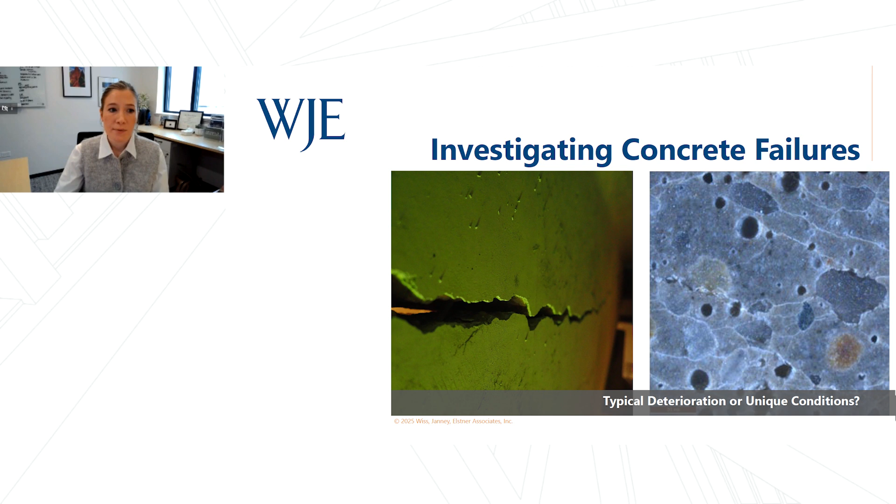During the next hour, materials engineer Todd Nelson and structural engineer Josh White will focus on two distinctive projects involving cracks and spalls that resulted from uncommon structural and materials failures. The presenters will discuss the process of conducting a structural and materials investigation and how, in these projects, the investigative process helped identify unique conditions that led to the failure.

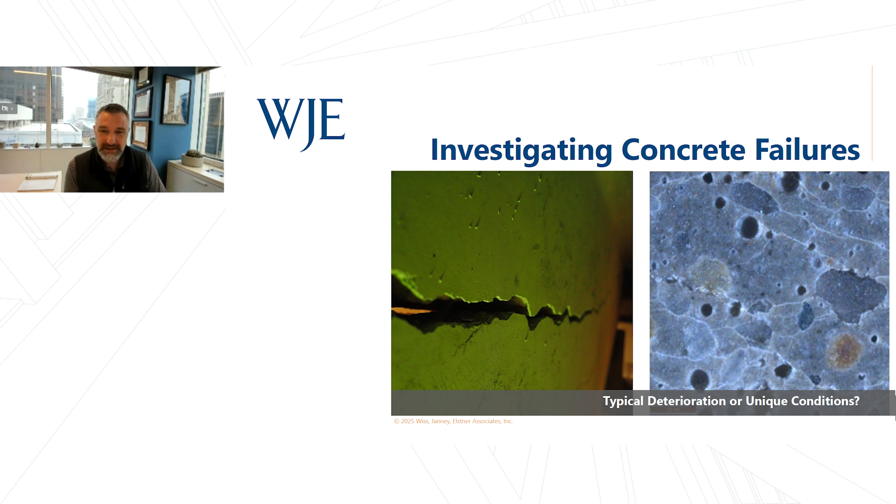Todd, my colleague, and I will be presenting on two unique concrete failures that we've investigated, and we'll be discussing how our investigation was prompted by owners who were observing and responding to signs of deterioration. At the time, the owners were perhaps unaware that the conditions they observed were actually quite unique. But as an owner, a property manager, or someone involved in helping address concrete failures, how do you know if what you are seeing is the result of typical deterioration or unique conditions? We hope that this webinar helps to answer some of those questions.

Accordingly, these are the learning objectives. Todd and I will start today by discussing the question, what is a failure? Then we'll review typical concrete deterioration mechanisms and what might be considered unique conditions. Todd's going to summarize the components of an investigative process, and then we're both going to present two case studies of unique conditions where the owner's responsiveness to finding these conditions helped to address the failure.

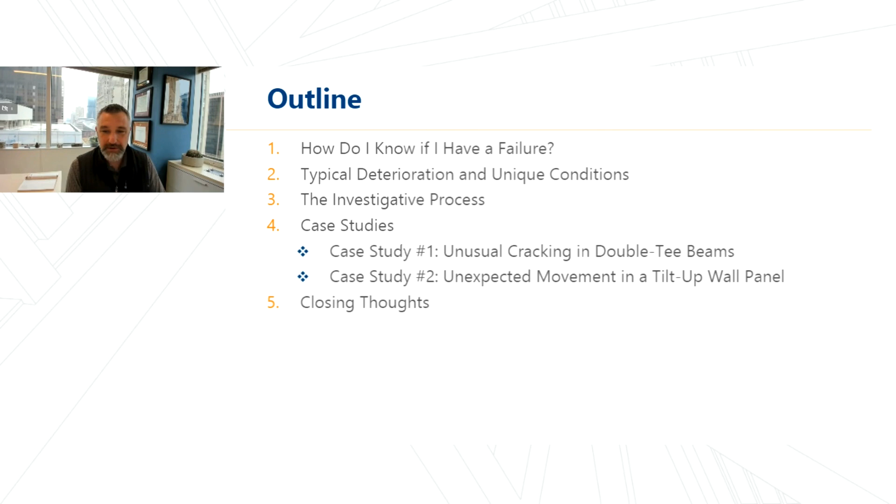So a question you may be asking yourself is, how do I know if that thing I see in my building is a failure? Before we go further, we'd like to discuss what constitutes a failure. What do we mean by a failure? It's worth discussing this for a moment, since failure seems like a simple word with a simple meaning.

It's telling that if I go right now to Merriam-Webster online, there are about 10 entries for this word covering related meanings and their derivatives. But if I were to ask you, the audience, what constitutes a failure, I might hear you say some of these things: loss of integrity, excessive deformation, stressing a material in a structure to its strength limit, or encountering the big one, perhaps only in California, immediate or progressive collapse.

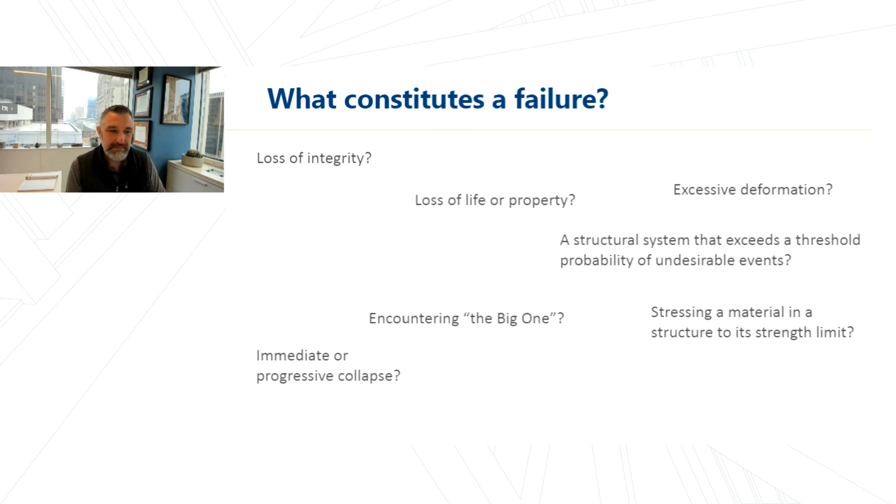And here is a longer definition: a structural system that exceeds a threshold probability of undesirable events, loss of life or property, the inability of a structural system to withstand intended loads, or simply falling short. This is one of the 10 Merriam-Webster definitions.

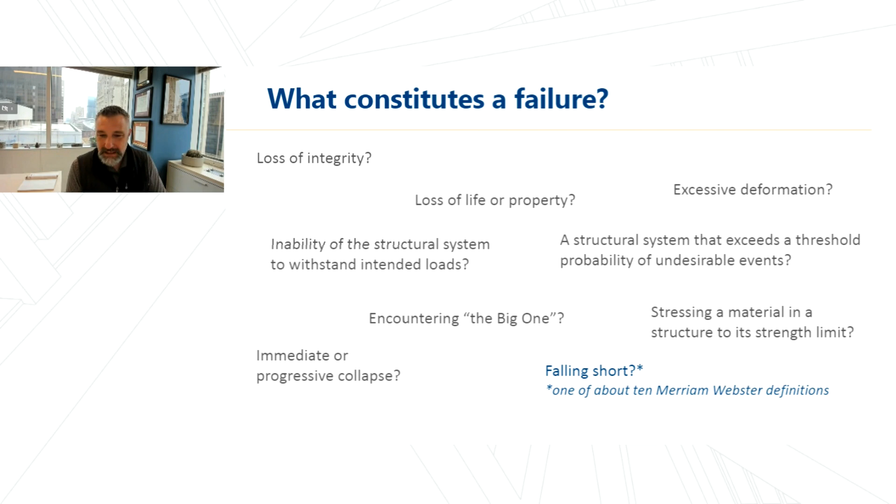And when you got an invitation to discuss failures with us today, no doubt some notable failures in our country popped into your mind, like some of these that you might recognize.

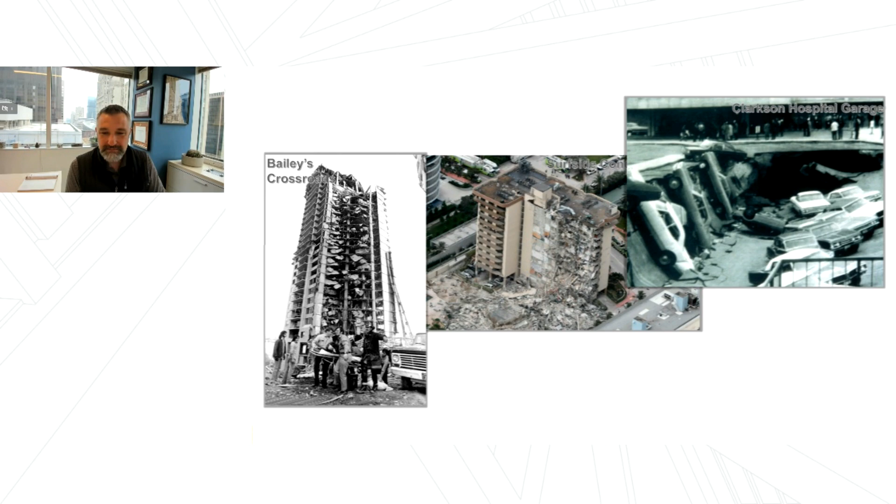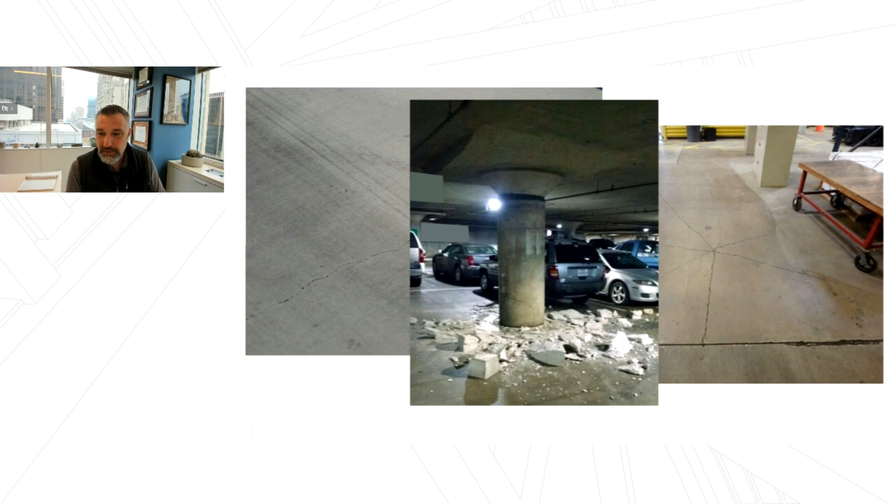But what about this column capital? I don't think there's anyone on this call who would dispute that this is a failure. But even so, the structure is still standing, and even though it is a prominent concrete failure, it's not necessarily a failure of the global system.

So you're likely asking yourself, how do I know that the crack in my slab or the spall in my garage is or is not a failure? As you can hopefully see by now, there are many ways to view and interpret a failure, and some considerations include determining if it is purely cosmetic, which may itself be a form of failure in that it's unmet expectations, or whether there are underlying problems and that simple crack or spall you see is just an indication of what's going on behind the scenes.

Perhaps in the worst case, depending on how severe the conditions are and where the deterioration is located, you may be concerned about a potential for the collapse of a structural element. In order to provide these answers, we use an investigative process.

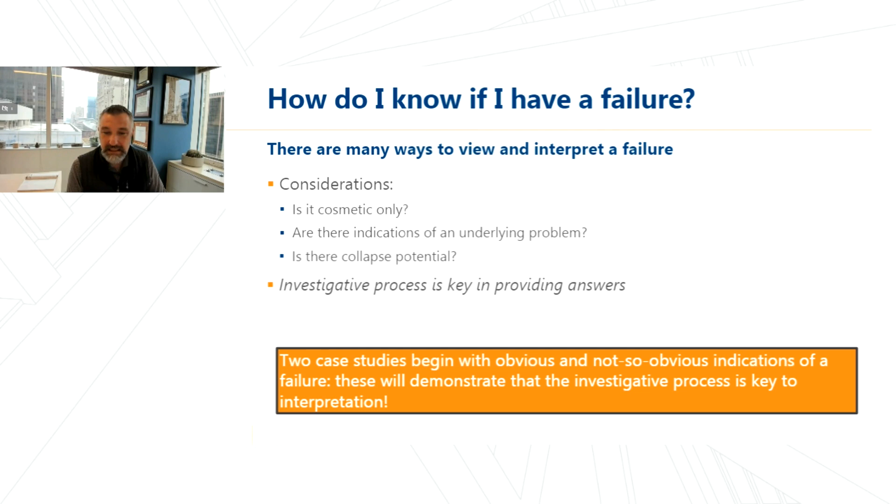Todd and I will present two case studies that begin with obvious and not so obvious indications of failures. These case studies will demonstrate that the process is key in understanding and interpreting what we're seeing in the field.

In the words of Professor Hardy Cross, paraphrased, strength is essential but otherwise unimportant, meaning that strength is just one of many considerations that structures must consider in design, as well as construction practices, architectural constraints, and the owner's needs. What constitutes a structural failure then is also more than just what simply meets design intent.

So let's move on to discuss some common damage and degradation mechanisms. This is a brief list, but it encompasses a lot of the mechanisms you might see in concrete structures.

We'll go over a few of these in the next few slides, but the main point here is that failure can be a relative term. It certainly can be catastrophic, but it can also be surface blemishes like on an architectural panel, and it depends on one's definition perspective, and these can both be strength and serviceability related.

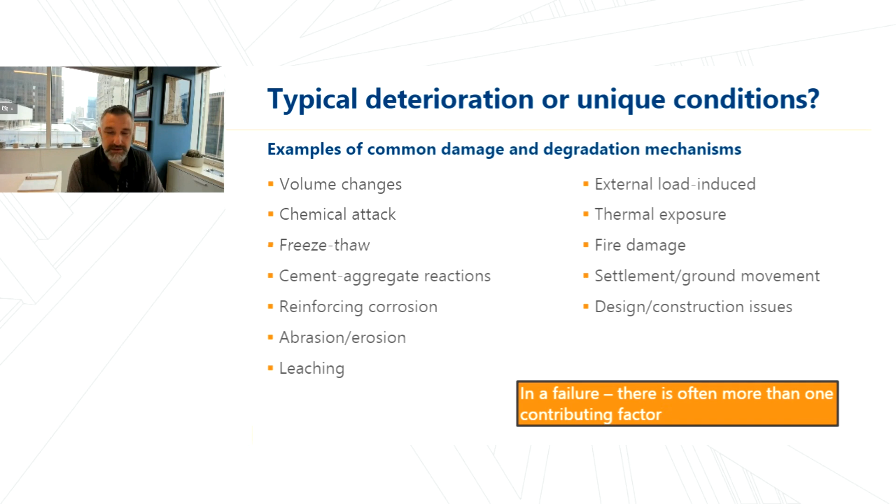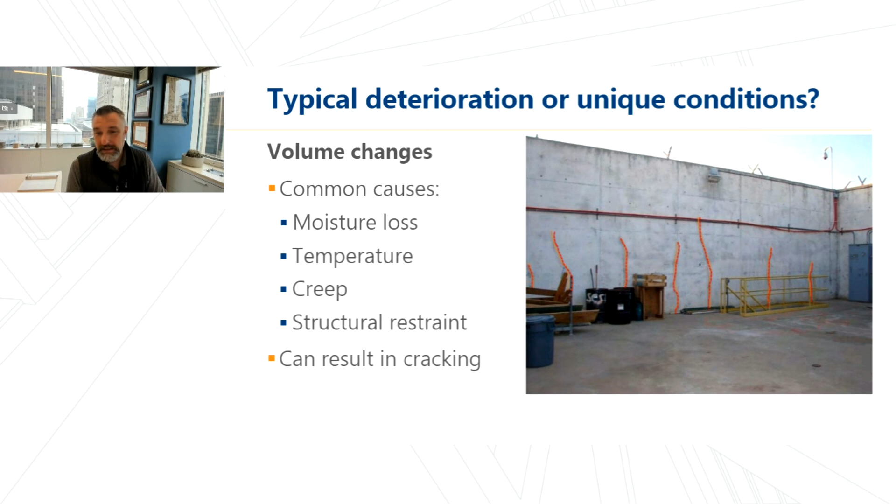Another thing to note is that when we have a failure, it is often more than just one contributing factor. Volume change, for example, is one mechanism which can be caused by several factors, and this can result in unwanted cracking. Chemical attack, which can be caused by various exposure conditions, can result in disintegration of concrete and eventual loss of concrete reinforcing cover.

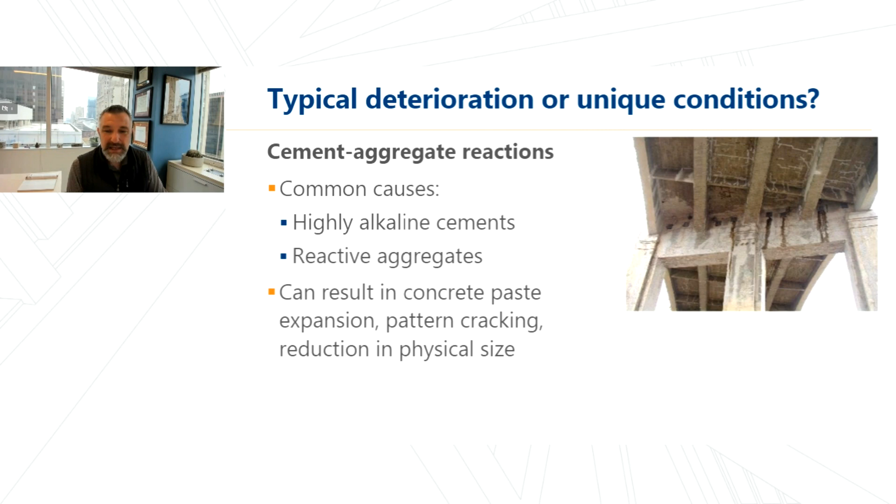Cement aggregate reactions are reactions that occur within the concrete constituents, and this can result in paste expansion, pattern cracking, and reduction of the size of a concrete member, and that can directly impact its ability to withstand loads.

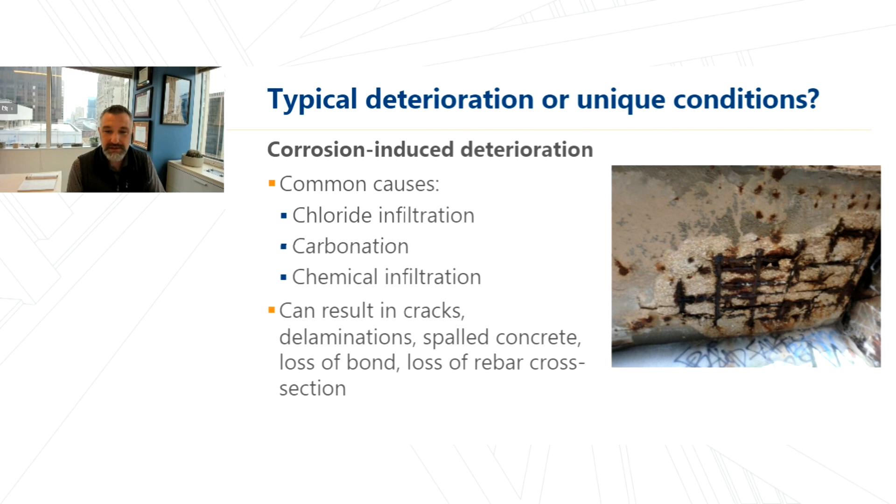Last, I'm going to talk about corrosion-induced deterioration, which is when specifically we have chlorides and carbonation that work through the concrete and they eventually reach the steel and cause corrosion. This corrosion can then result in cracks, delaminations, and eventually rebar section loss.

So you've got this crack in your structure, say it's the one we've seen before here, and how do you know which of these mechanisms may be at play? Is it expected behavior and not a real failure? What caused it? Can I leave it alone with no consequence? Should I repair it? How do I repair it so it doesn't come back?

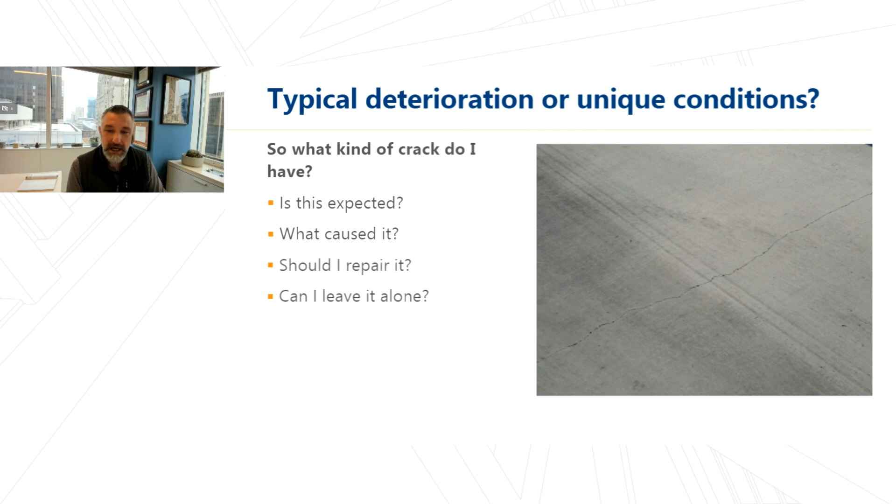I'm going to turn it over to Todd now, and Todd's going to discuss the next steps we take in determining those answers. We're going to call it the investigative process.

Thanks, Josh. I'm going to go through the investigative process that we use to assess these deterioration mechanisms and ultimately assess the significance. And these steps can be applied no matter what the deterioration is, whether it's a crack, whether it's a spall, whether it's a delamination.

The typical first step is an initial site visit, where we try to get the lay of the land and get a basic understanding of the problem at hand.

Then we typically dive into a document review, which may include review of the specifications, review of the drawings. You know, those drawings that are tucked in the basement in the back corner, those are valuable to us, right? We may also interview maintenance staff and review reports that have been previously done on the structure. All of that information is reviewed with the idea that we're trying to know as much as we can about the structure prior to a site investigation.

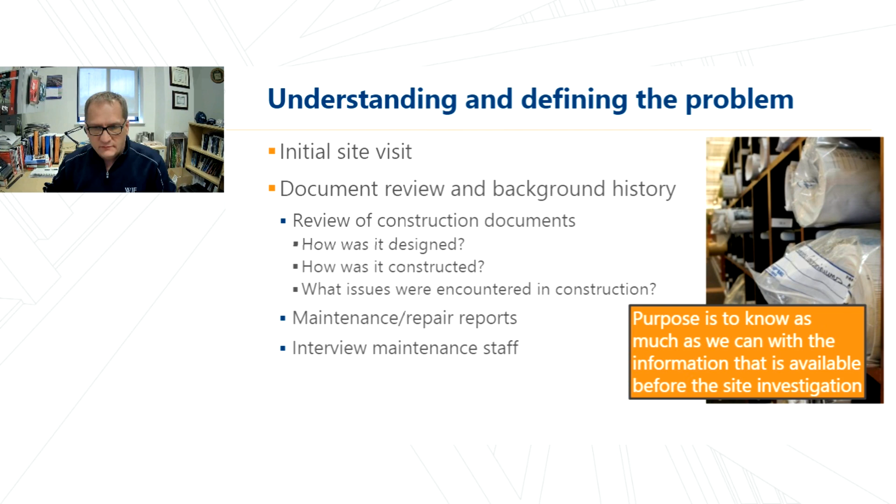So that would lead into a general site investigation where we document the existing conditions. We understand if there's any patterns to the deterioration. We try to understand the exposure conditions, and we take visual observations and document those observations. The ultimate goal there is to ask the structure, understand what the structure is telling us so that we can better understand the cause and the significance of any deterioration.

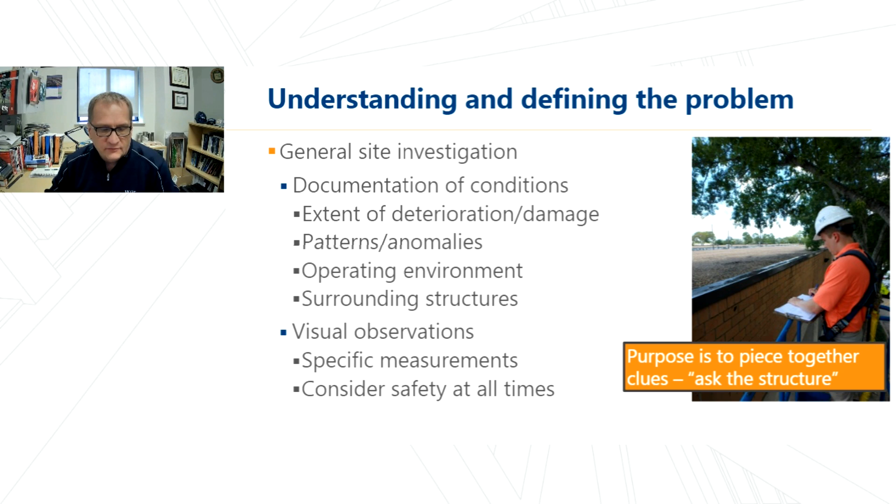From there, we may go into a more detailed site investigation which may include non-destructive testing and material samples. We may collect samples of the concrete to analyze further in the laboratory. We also may make exploratory openings to understand more about the structure. As part of that, the samples we do collect, we may do some physical or chemical testing back in the laboratory to better understand the condition of the structure. The purpose here is to collect more detailed information for analysis and laboratory testing.

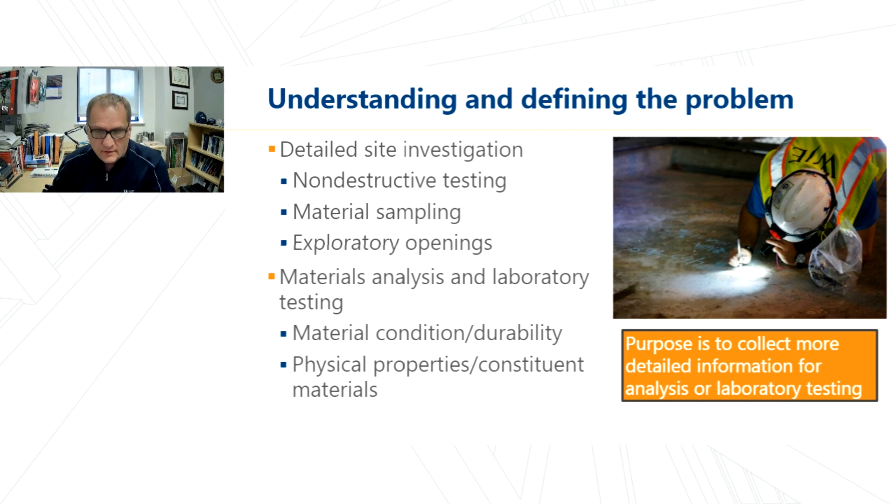Then we take all that information together from the field and from the laboratory testing. We analyze it and reduce the data. We may do some additional analysis at that point, whether that be structural analysis or something else. And in the end, the goal is to help the owner develop repair options or remedial actions for the structure.

That's the investigative process from a very high level. I'm going to lead into a project example where we employed the investigative process to uncover a very unique but very interesting problem with cracking of double T beams.

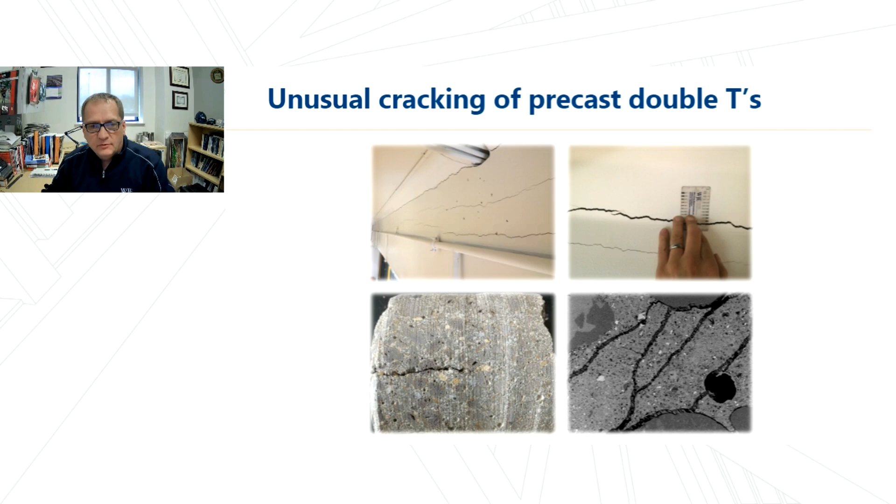As a little bit of background, the cracking had occurred in double T beams on the roof of a gymnasium.

Before we dive into the details of the case study, I'm going to introduce some terminology that I'll use throughout this case study that may help the audience understand what a double T is. The first part of the double T is the stem, which is the vertical element. The next element is the flange, which is a horizontal element. And the final one is what we call the fillet, which is the transition between the flange and the stem. I'll be using these terms as I discuss this case study.

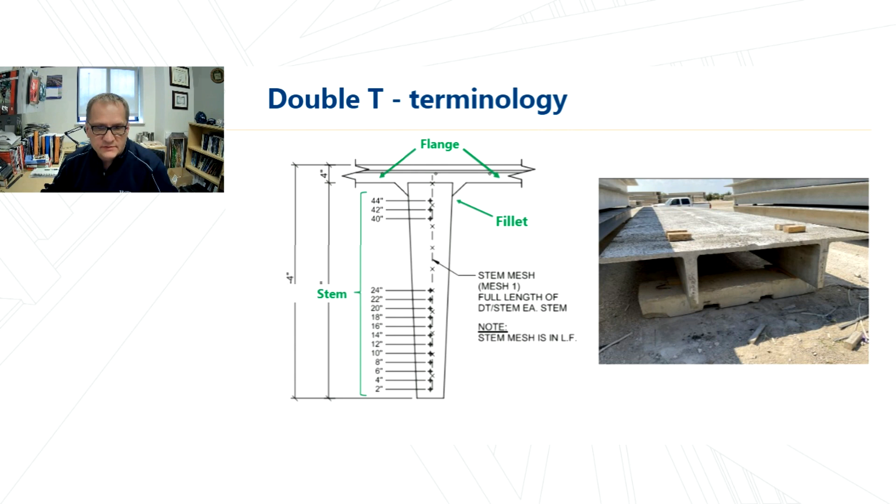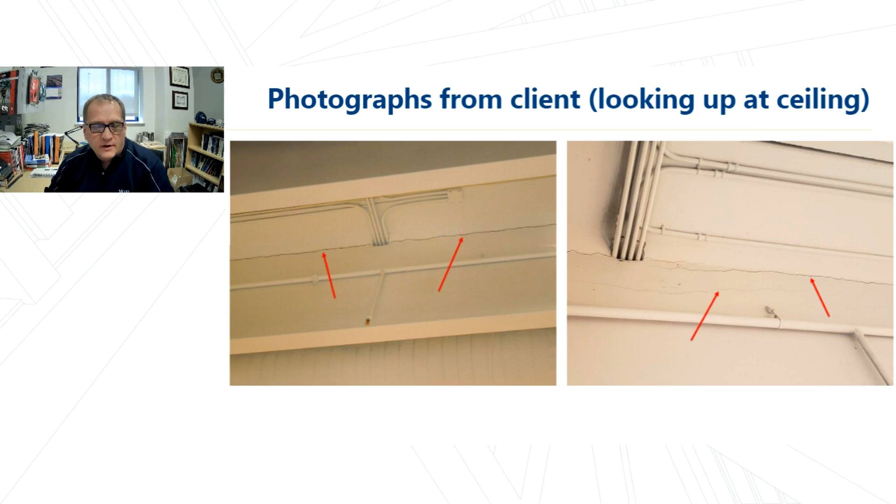We got these pictures from the client, and we took a look and saw these cracks. We're looking up at the ceiling in these photographs, with cracks at the fillet shown on the left photograph. On the right, we've got cracks at the fillet and on the face of the stem of the double T. We got a couple more photographs here, again showing cracks along the fillet.

Based on these photographs, we would guess that these cracks are fairly large. We don't have a scale, but we have an indication that we have some pretty wide cracks along the fillet.

We got a little bit of background information about this project. 11 precast double Ts were fabricated for this project in 2018 and then installed in 2019. It supports the gymnasium roof for a middle school.

It was also designed as a storm shelter, which is a very important item to understand when we assess this structure. It was designed for ICC 500 storm shelter load, so it was used as the middle school's tornado shelter.

They first noticed this cracking in 2022, about 3 to 4 years after the double Ts were fabricated. They were installing some sound matting when they noticed these cracks.

They put a no-occupancy order in place once they saw these cracks, so the kids could not use the gymnasium at all. We were contacted shortly thereafter to help them assess this cracking and employ our investigative process to understand why they are getting these cracks.

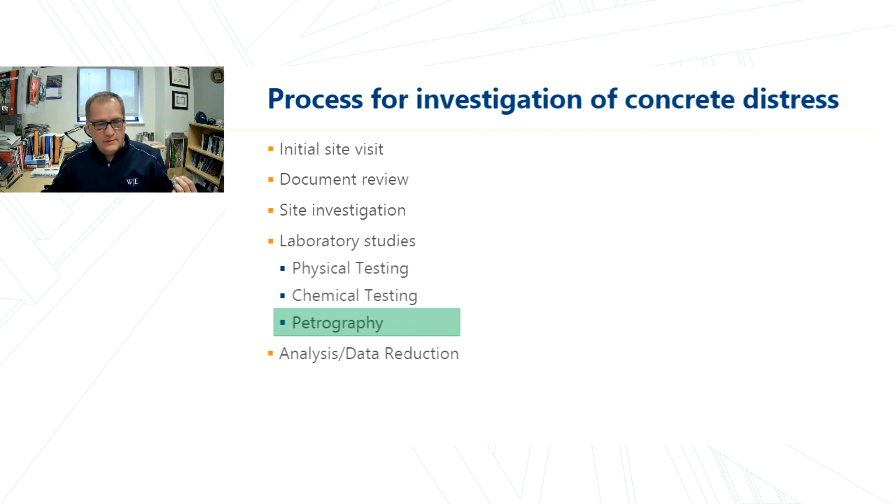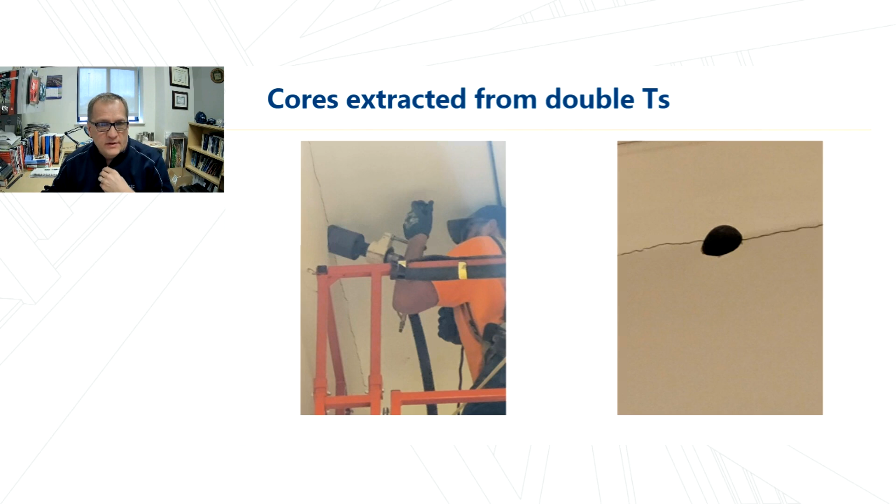Circling back to our investigative process, we employed all of these on this project throughout the duration of our investigation. We started with some laboratory studies, specifically petrography, because our client had already extracted some cores from the cracks at the fillet locations. They extracted 4 cores and sent them to us to examine petrographically.

For those who don't know what petrographic analysis is, it's a series of observations that our geologists make on cut cross sections of the cores to understand what the concrete is made of, what's in it, and if there's any potential distress mechanisms within the concrete.

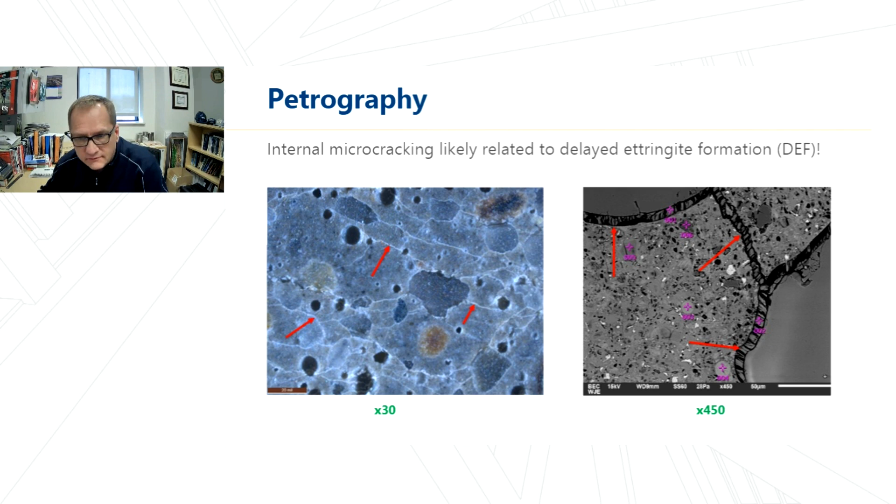So what does that mean? DEF is an expansive reaction within the paste that results in loss in strength and stiffness and eventually leads to cracking. In order for this to occur, we need three requirements. One being the chemistry of the cement or cementitious materials. We have to have the right chemistry for this reaction to occur.

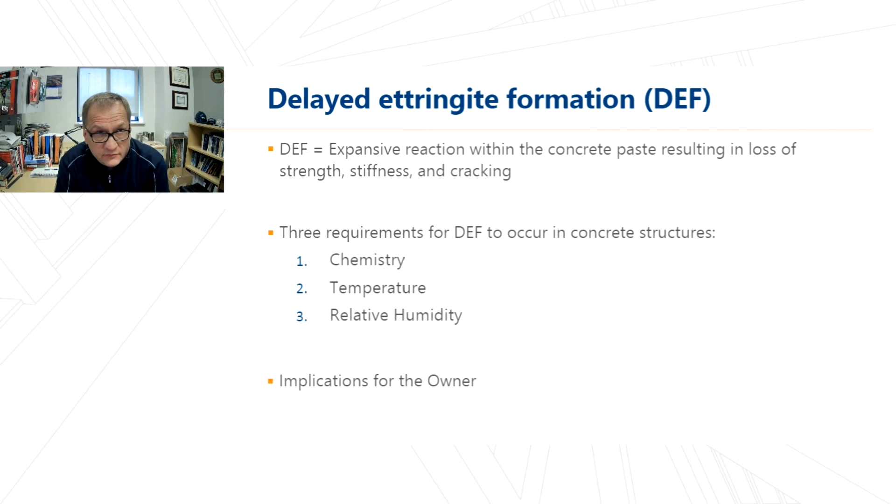In addition, temperature. We need early age temperatures high enough for this reaction to occur. In the industry, general conservative guidelines suggest early age temperatures have to be greater than 160 Fahrenheit, meaning within the first 24 hours. We also need sufficient moisture, so the relative humidity within the concrete needs to be high enough, generally understood to be greater than 92%. So we need all three of those things to occur for DEF to happen.

So what does this mean for the owner? For obvious reasons, the current structural capacity is a concern. In addition, because this reaction can continue to occur, what does this mean for future cracking and future structural capacity of the double T's?

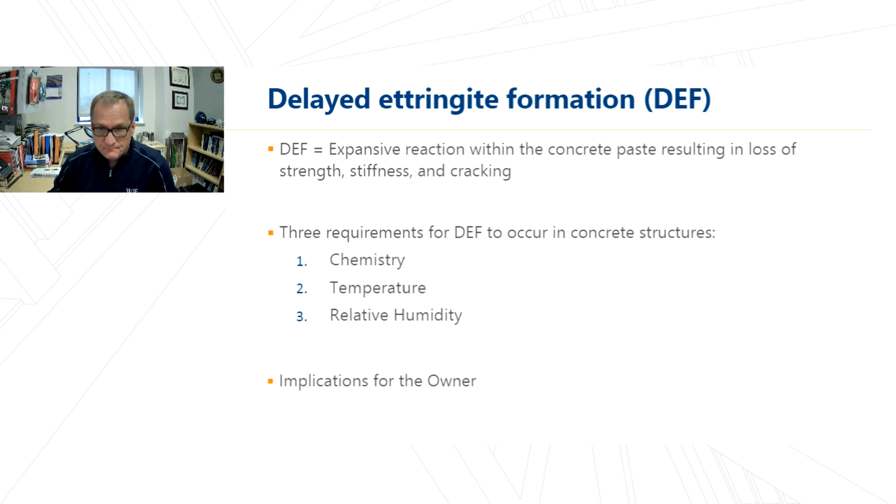Circling back to our investigative process, we did a document review. In this case, we took a look at the mix design used to fabricate all the double T's, which included 900 pounds of type 3 cement. Why is that significant?

It's significant for a couple reasons. One, 900 pounds is a lot of cement in a mix design. In addition, type 3 cement is very fine, and both of those would generate a lot of heat during the early ages of the concrete.

In addition, we found that the chemistry of the cement was the right chemistry for DEF to occur, which we subsequently verified in the laboratory. We also found that no supplementary cementitious materials, or SCMs, were used. This is important because SCMs can help mitigate DEF.

We also found that the coarse aggregate was lightweight, and we'll circle back to why that's important a little later. We also found the design strength was 6,000 PSI. So that's useful information from the document review.

We also took a look at the drawings and found that these double T's have 15 pre-stressed tendons in the stem. The double T's were all cast in the summer of 2018 in a climate that was quite warm. We also learned the double T's were not externally heated, meaning no external heat like steam was applied during curing. We often see DEF issues in precast elements when external heat like steam is applied to the product, but they did not do that in this case.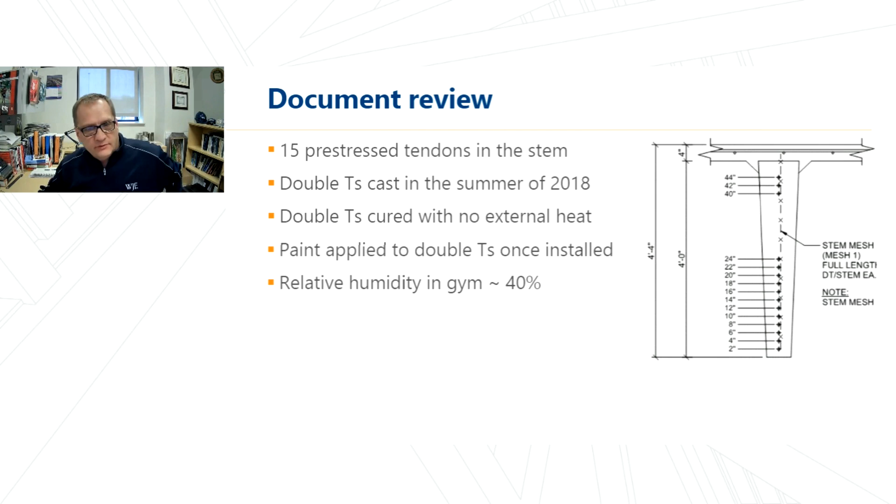We also learned that paint was applied to the double T's once they were installed, and we'll circle back to why that's important later. Based on maintenance records, the relative humidity in that gym was maintained at about 40%. So you may be thinking, we need 92% RH for DEF to occur, but the gym is at 40% RH—why do we have DEF? We'll get back to that a little later.

So we proceeded to do a site investigation as part of our process, which included mapping of the cracks, extraction of additional cores for physical testing and additional petrography. We also did some non-destructive testing: ground penetrating radar, internal relative humidity testing, and ultrasonic pulse velocity testing.

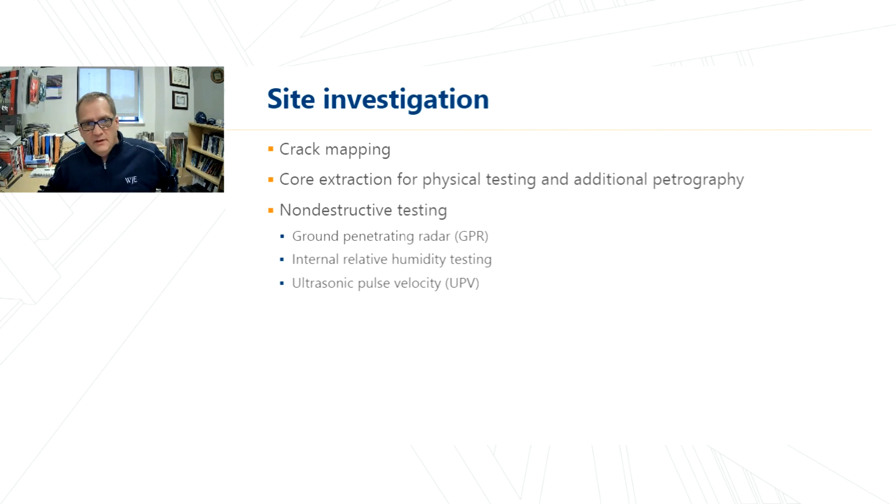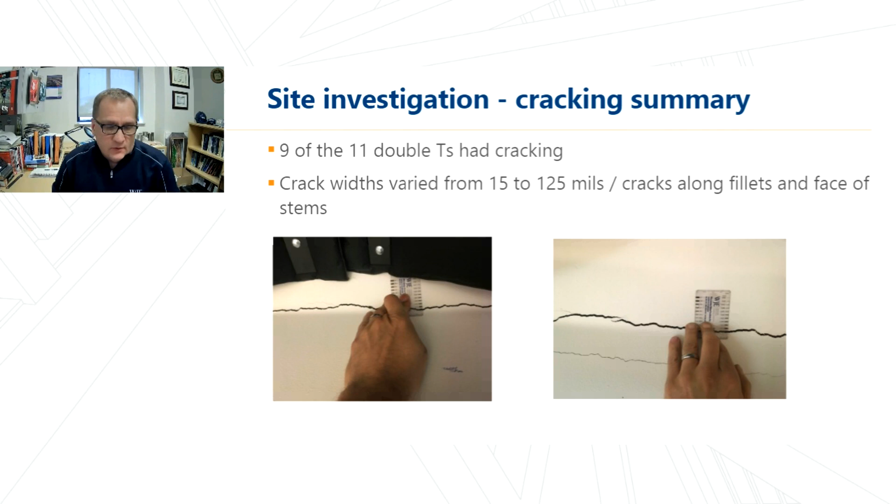The crack mapping we did covered every single double T. We found that 9 of the 11 double T's had cracking, either at the fillets or potentially on the face of the stem, so 2 of them do not have cracking. The crack width varied from 15 to 125 mils—125 mils is a pretty wide crack, about 1/8 of an inch. So our suspicions were verified that some of these cracks are very wide.

So as part of the site investigation, we did GPR, ground penetrating radar. For one reason, we wanted to verify the location of the steel versus the design, to make sure it was constructed consistent with the design. We also wanted to locate the reinforcing steel to avoid it during our core extraction.

And we also did internal relative humidity. Again, we wanted to know what the internal relative humidity of the concrete was to see if it was consistent with the formation of DEF.

So we installed internal relative humidity probes on 5 different double T's, with the idea that we're measuring the flange relative humidity and then 2 spots on the stems. These were installed at the mid depth of each of the concrete elements, because that would have the highest internal relative humidity.

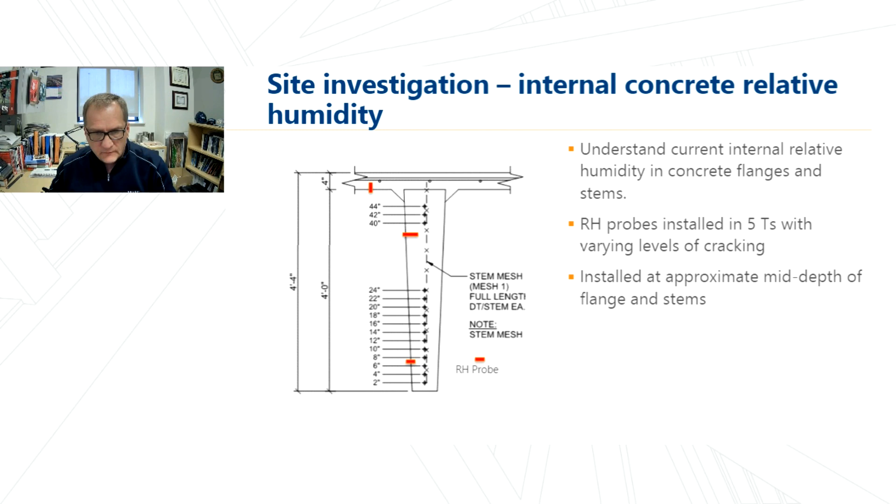This picture actually shows the probes installed, with 1 in the flange and 2 in the stems. They would be installed and allowed to come to equilibrium, then we'd connect to these probes with our reader and determine the internal RH.

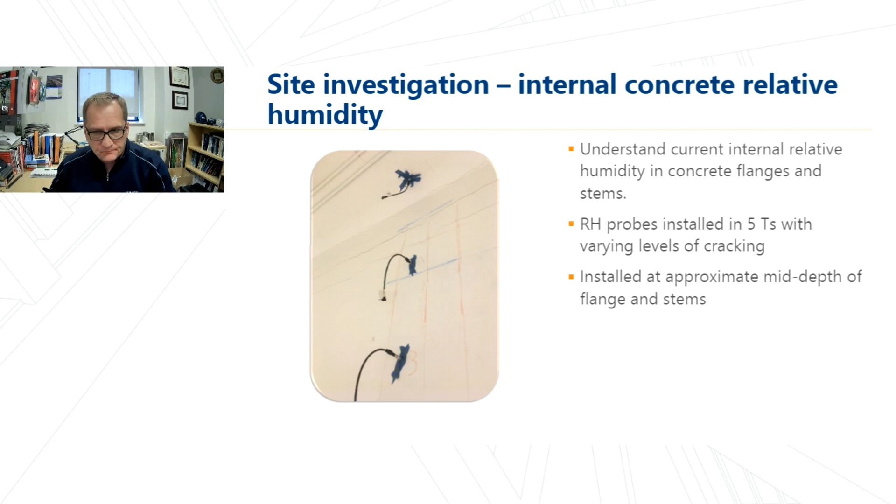So what did we find? We found that the internal relative humidity within the concrete was between 71.7 and 84.5%. So we're currently at a state that is less than the minimum RH, 92%, for DEF to occur.

So what does that tell us? That tells us that we currently are in a state where the DEF reaction will likely no longer occur. And that's beneficial to the owner, because the likelihood of the cracks getting worse is minimal, because we don't have enough moisture in the concrete.

So we also did ultrasonic pulse velocity on the double T's. We do this by sending a pulse through the concrete member, which is received by a transducer on the other side of the concrete element. And if we have the member thickness and the time it takes for that pulse to go through the member, we get the velocity, which can be related to the stiffness or elastic modulus of the concrete.

This particular method needs to be correlated to the core compressive strength, which we did, and we'll talk about in the next slide. So why did we perform UPV? Because with the continued reaction of DEF, the stiffness of the concrete will decrease. So we were trying to pick up differences in the stiffness of the concrete associated with the DEF.

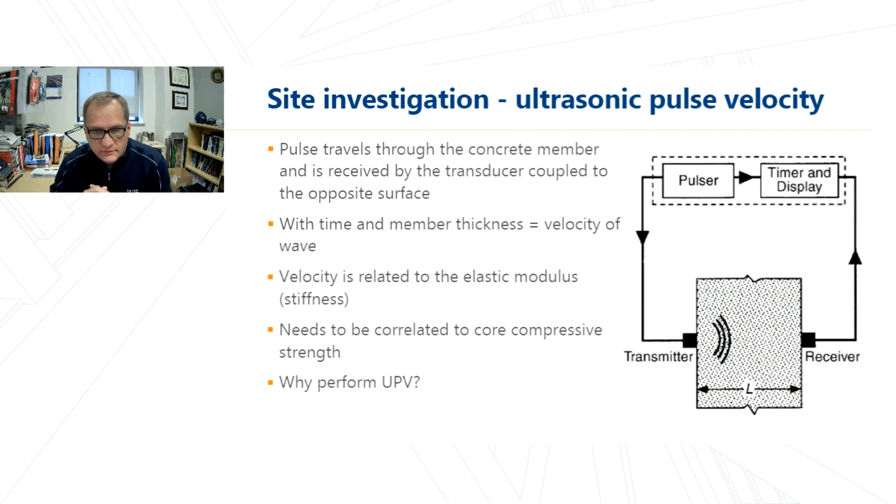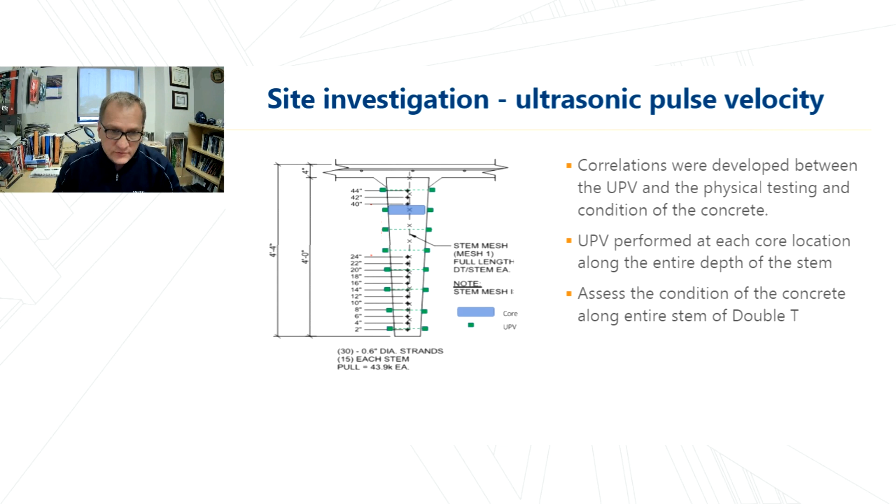So we did this by taking our UPV and measuring the pulse velocity at different elevations from the bottom of the stem. We also, at specific locations, extracted cores through the entire stem at the locations where we had previously measured the UPV, again trying to establish the correlation between velocity and strength of the concrete. We did this on numerous double T's to have a pretty good understanding of the velocity and strength of concrete.

And what did we get? We actually got a pretty good correlation with the idea that the compressive strength of the concrete in place decreased as we went up on the stem. So higher up on the stem had lower compressive strength than lower on the stem. This is actually consistent with what we'd expect from DEF, the thicker sections will actually get hotter, and because of that, we'd expect that reaction to be worse.

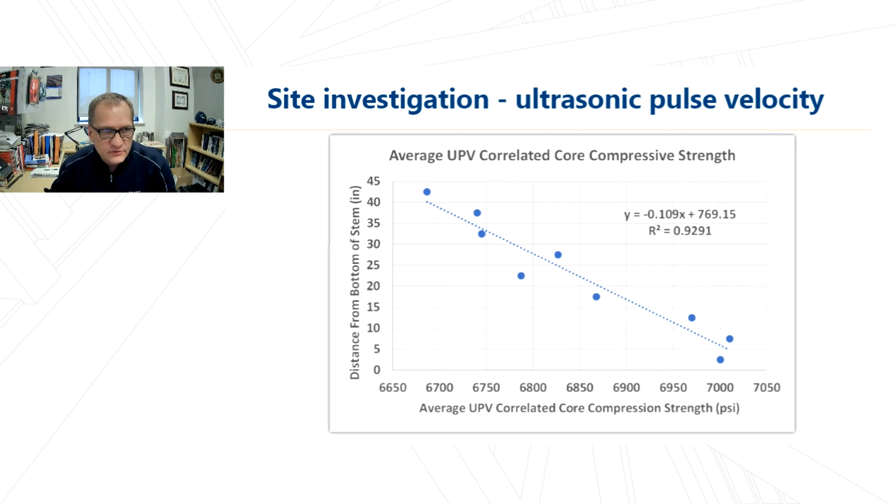So we did take those cores, like I mentioned, and we measured the compressive strength and the modulus of elasticity, the stiffness of the concrete. We found on average that the compressive strength of the in-place concrete was higher than the design strength. So that is good news from the owner's standpoint, that we have not compromised the compressive strength.

However, the modulus of elasticity that we measured, which is essentially 3.0 times 10 to the 6 psi, was lower than we expected for the compressive strength of the concrete. We typically expect this to be about 3.5 times 10 to the 6. So that finding in itself is also consistent with DEF formation and the idea that it decreases the stiffness of the concrete.

So we also took additional cores for concrete petrography, and we took a look at those both from cracked and uncracked double T's, meaning the cracked double T's either had fillet cracks or cracks on the face of the stem, or they did not.

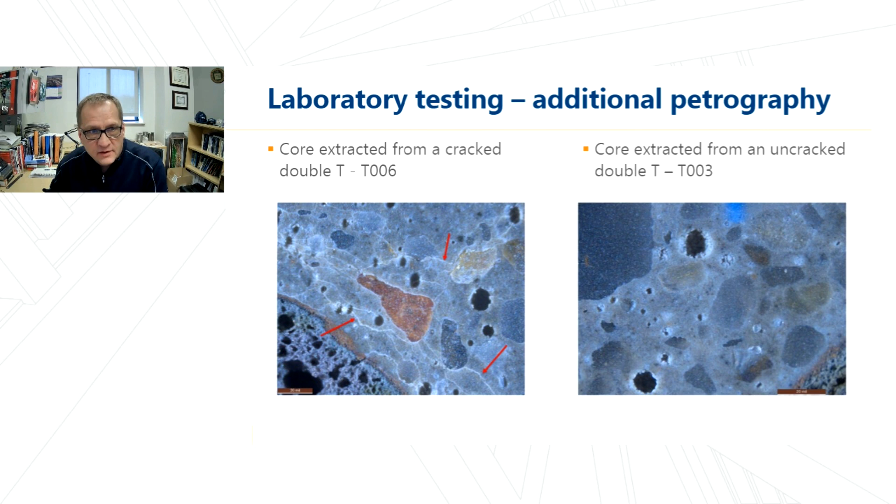We took a look at those under the microscope, and the photograph on the left is from a cracked double T, where we could see those characteristic cracks that we previously saw a couple slides ago, with cracks filled with ettringite crystals. Now, on the uncracked core, which is the photograph on the right, we do not see that typical classical DEF cracking.

So you may be asking why, and we'll get to that later.

The next part of the investigation process was doing some thermal modeling. We wanted to know if we had conditions at early ages of the concrete conducive to the formation of DEF. So we modeled the double T's using the geometry, the heat signature of the mix, and information gathered from the supplier related to concrete temperature at placement and ambient conditions during placement and shortly thereafter. We put this into our thermal modeling software.

And sure enough, we modeled temperatures in excess of 180 Fahrenheit. That's higher than the 160 Fahrenheit I mentioned previously as a conservative guideline for DEF not to occur. The primary contributing factor to that, as mentioned before, is the quantity and type of cement used in the concrete mix design.

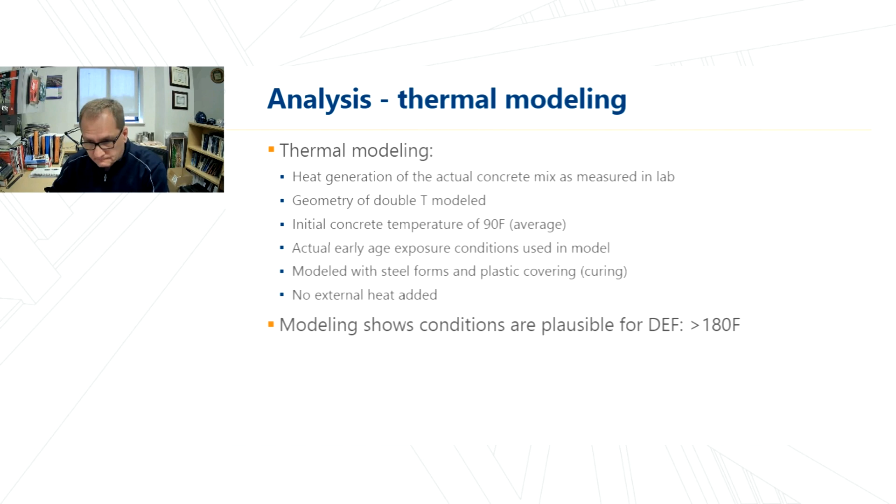We also took a deeper look into the thermal consequences of these double T's, looking at concrete placement temperatures and ambient temperatures during placement and shortly thereafter. What did we find? The two double T's that did not crack in the field had the lowest concrete temperatures at placement and the lowest ambient temperatures at placement and shortly thereafter. We concluded that these lower temperatures were the likely reason why these didn't crack and the others did.

So why did these double T's crack? We have an expansive reaction within the paste of the concrete that is restrained internally and externally, but the cracking pattern we saw, most of these cracks were longitudinal. This was not typical of the cracking pattern we see on concrete elements affected by DEF. This photograph shows a more classical cracking pattern when DEF is the primary mechanism, this map cracking. We did not see that.

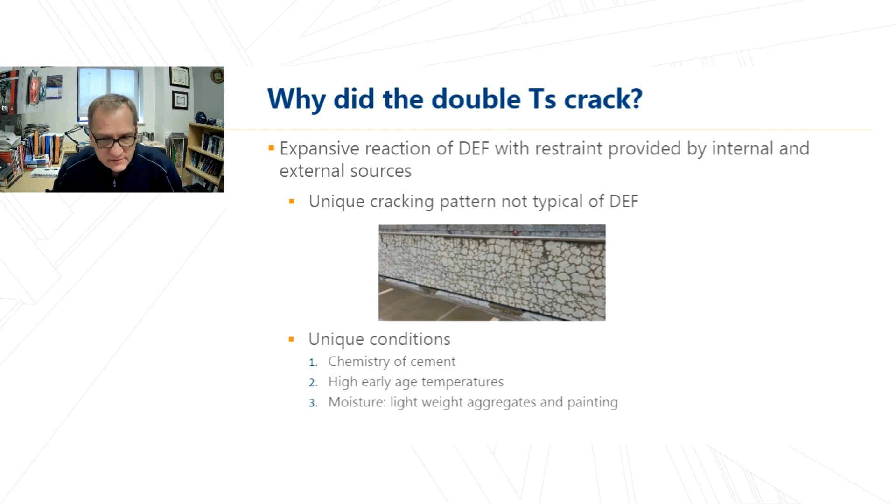In addition, they painted the double T's shortly after installation. We found that paint was actually a vapor barrier. So those two things in combination were likely sufficient to keep the relative humidity high enough inside the concrete for the DEF to occur. The existing conditions when we were out there weren't conducive to that, but previously the conditions were likely high enough for it to occur.

So we jumped from there into the analysis. We did some structural analysis to see the current capacity of the double T's. We found it was okay for occupancy, but not as a storm shelter. And that's important because they had built this to be used during tornado events, so the kids could use the gym for play and whatnot, but not as a storm shelter.

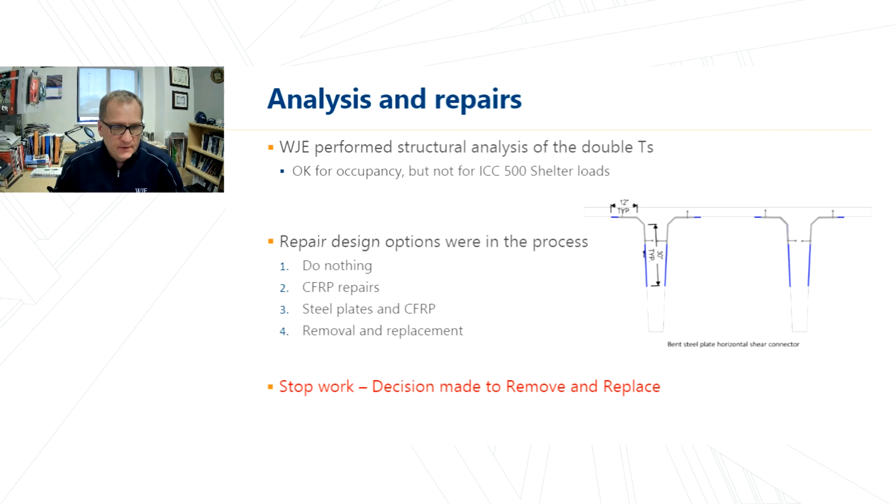So we started to do design options. The do-nothing option was obviously not reasonable and not appeasing to the owner, right? They designed this and built it for a storm shelter, so the do-nothing option wasn't an option. We also looked at other repair options with the end goal to restore structural capacity consistent with the ICC 500 shelter loads. Ultimately, the owner decided to remove and replace, which is a reasonable option. So our work stopped at WJE and they ended up removing and replacing.

In the end, we've got some lessons learned here.

One of the lessons is the importance of the investigation process. This process is really needed to help us identify the DEF and also uncover the unique conditions that led to the DEF. It helped us understand the significance of the cracking, and also helped us with repair options, and ultimately educate the owner related to the implications of finding DEF.

It's also important to note that not all cracks are this significant, but the process for the investigation is the same. And DEF, as I mentioned before, is very rare, and it manifested as unique cracking conditions.

The last thing I want to highlight is the communication that's needed with the client in this particular situation. Finding a DEF was important, but the implications of that to the performance of the structure and the structural capacity had to be communicated to the client. The scope of work as we were investigating was very fluid, so we had to keep the client updated with the timeline associated with that, and ultimately the significance and limitations of any findings we have.

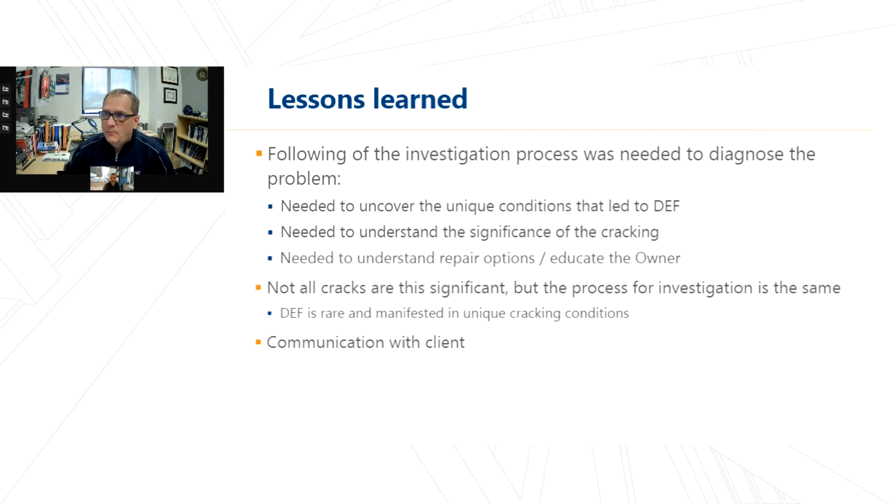Thanks, Todd. So the case study I'll be discussing starts with some unexpected movement in a concrete tilt-up wall panel. What's the issue? Tenants had complained to the owners that their building was making unusual noises. The owner took prompt action to investigate and reported a vertical crack in between two panels at the sealant joint, if you were to look from the exterior of the building. There were no other signs of distress.

Upon our arrival, our initial scoping site visit, we determined that the reported cracks were actually the sealant joint ripping apart between two adjacent wall panels. We also saw that the tilt-up concrete wall panel was tilted, but a little bit more so than usual. We asked for a ladder to take a look at the roof framing from within the building and asked if the owner had drawings so we could make sure we understood how this single-story building was framed.

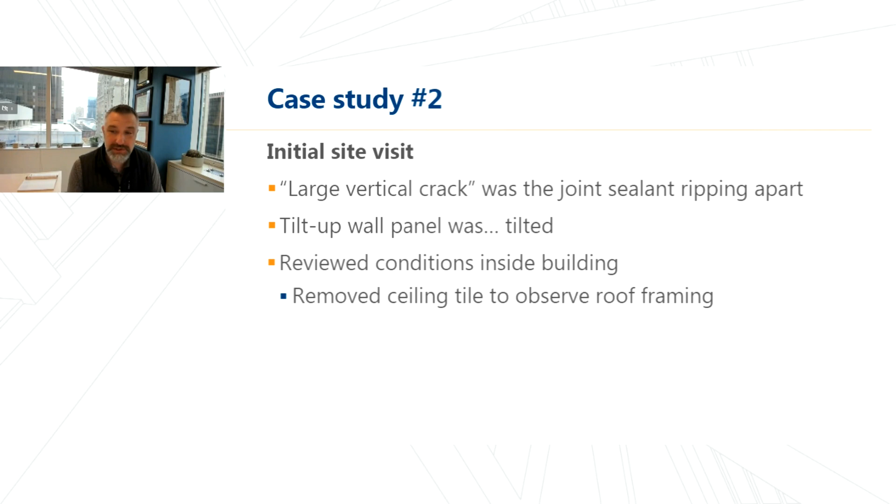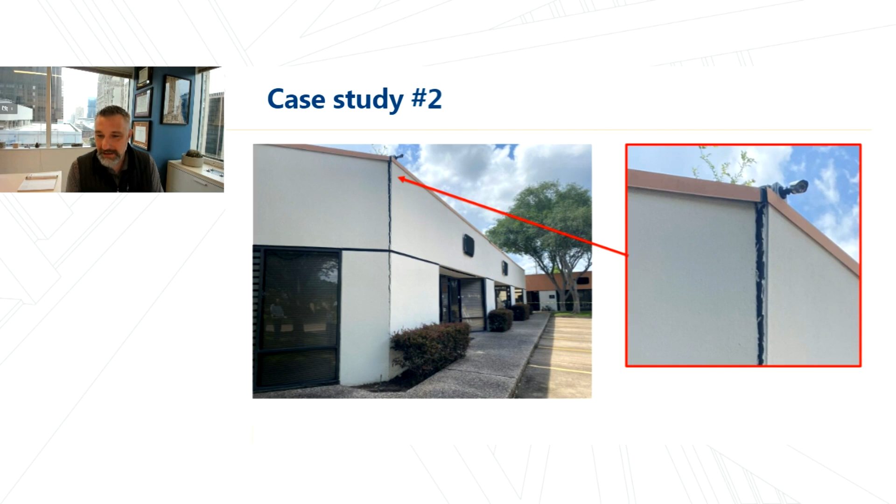Here's a picture of the crack, and as you can see, this is not good. When we lifted the ceiling tile and poked our head up above the ceiling tile to observe the roof framing, this is what we observed: the joist had pulled out of the wall panel, which is obviously supposed to support the roof framing.

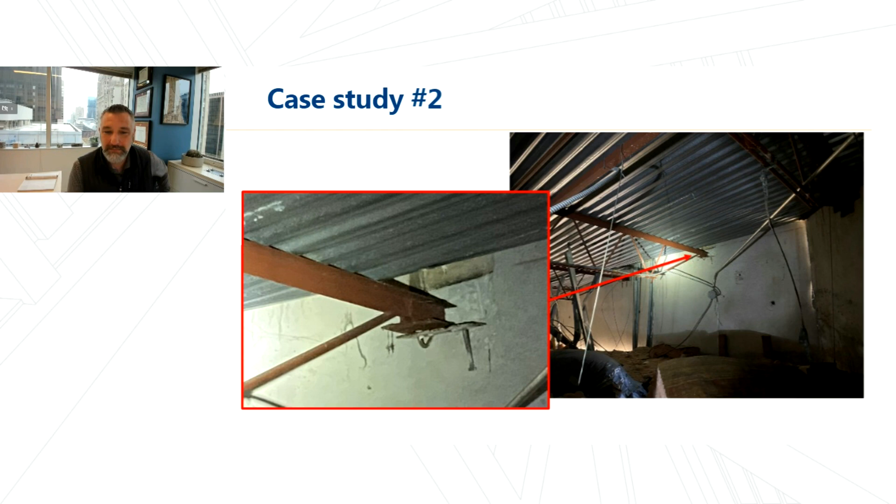So I've talked about joists and wall panels, so let's take a second to describe what it is that we are actually looking at and how these parts fit together. The tilt-up wall panel, which has its name from the way it's constructed, has an intentional void pocket, so that the roof framing can be supported within the wall panel. In order to connect the roof framing to the panel, there's an embed plate that's cast into the wall using headed studs, and the joists sit in the void pocket and then are welded to the embed plate.

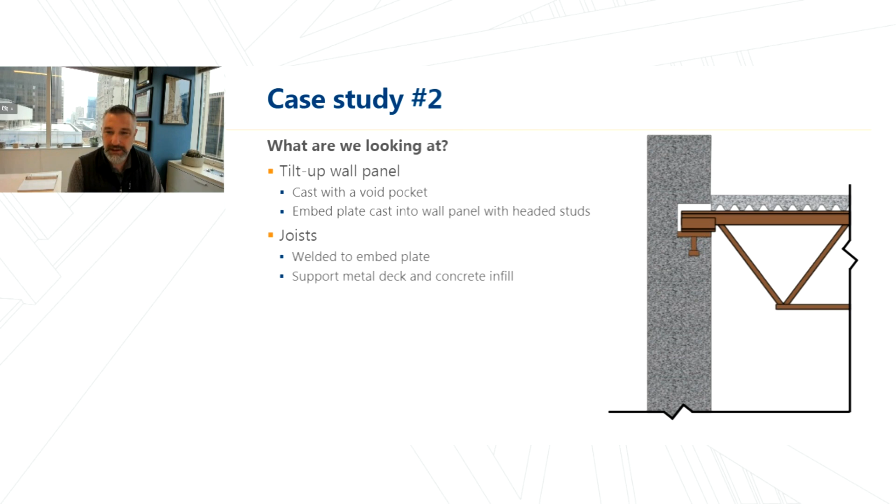The joists then support a metal deck, which then supports the concrete infill. Then you've got the roofing material installed all over this. Then you have your interior finishes, consisting of the cold framing or metal studs that can go all the way up to the roof. Then you have the suspended ceiling that's suspended from the framing, and then you have your drywall.

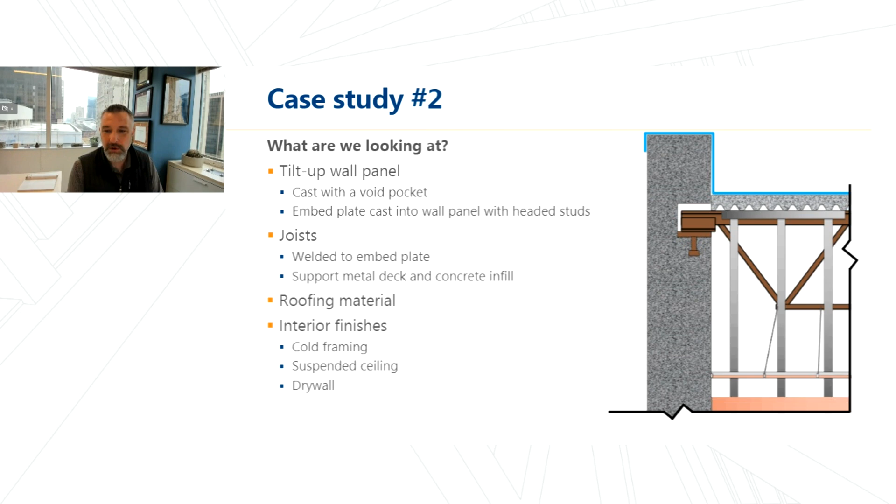So when we poked our head up above the ceiling tile, we saw that not only did we have a number of joists that were no longer supported by the wall panel, but the fact that they were pulled out caused them to essentially drive out the wall panel. Now, mind you, this is as we have our heads stuck up above the ceiling tile, so we could actually see the cold framing bending as we were staring at it. These members here were once vertical, but now have buckled. So this is a failure, and it's a unique condition.

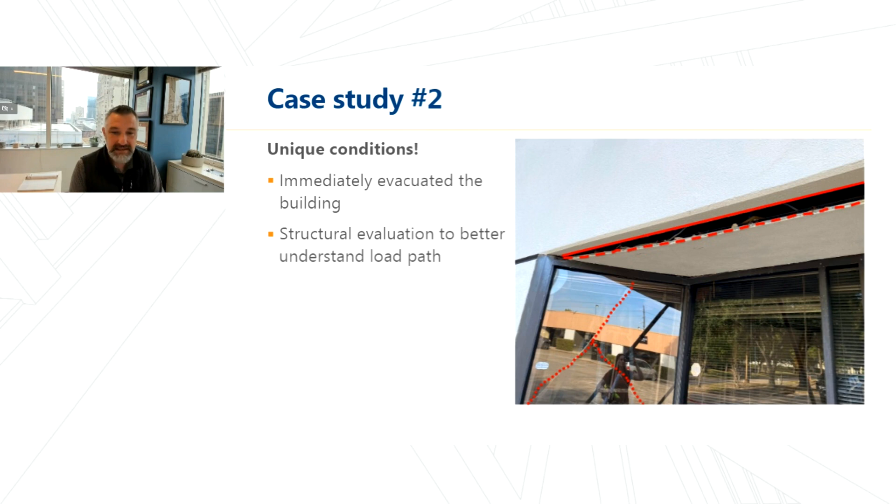We immediately assisted in evacuating the building, and as soon as we had done that, the soffit had deflected due to the deflecting joists, and that immediately caused the curtain wall or the glass enclosure to shatter. So, perfect timing.

Now, during unique events like this, the investigative process is still followed, but as you can imagine, it's not quite so linear as Todd presented. So this one, we started out with our initial site visit, and within hours, we were trying to design a repair. So what had happened?

Based on our review of the drawings and confirmation of the field conditions, there were about 4 joists that had pulled away from the tilt-up wall panel, and this is the wall panel here in red. And here is the beam on the interior portion of the building that supports the roof joists on the interior side.

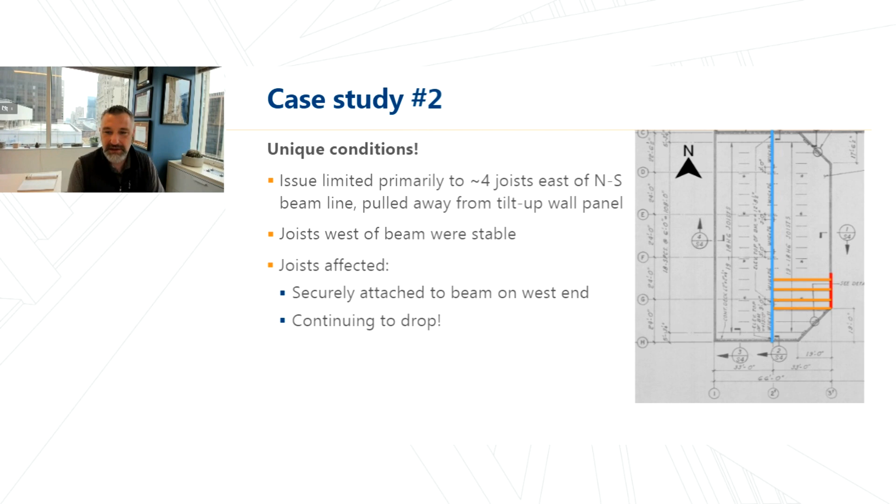So we had the 4 joists that are supported on the beam on the west side. They were once supported by the wall panel on the east side, and all of the other joists in the surrounding vicinity seemed to be stable. But the 4 joists continued to drop.

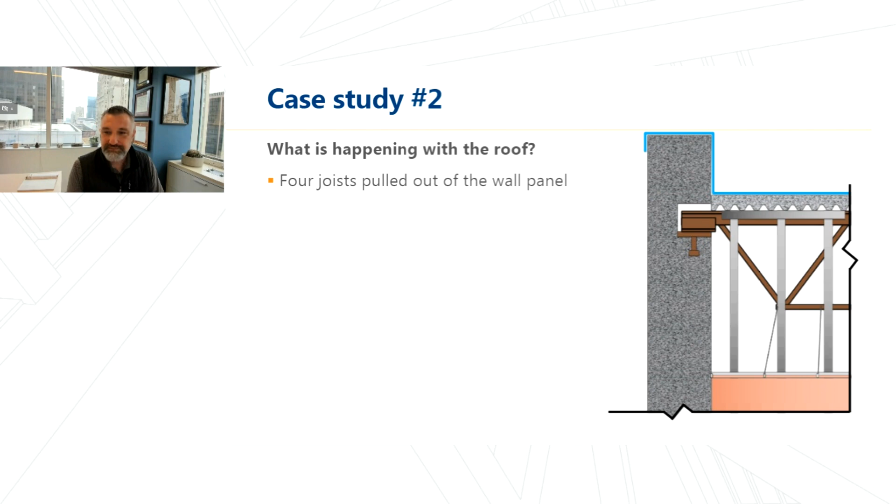So here's our profile of the roof framing again. The 4 joists had pulled out of the wall panel, and they were pushing and rotating the panel outward, and the cold framing was bending under the weight of it all. I'm going to remove the non-structural elements here so you can see the mechanism that we're seeing.

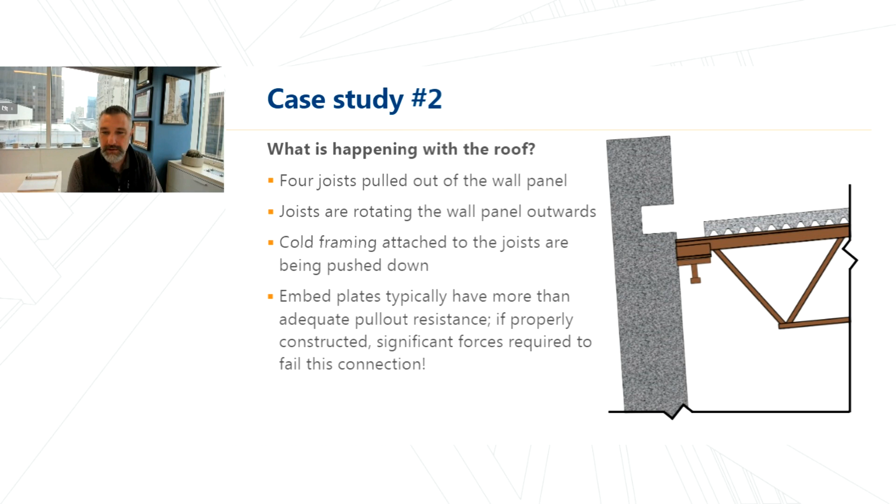The embed plates not only keep the joists in place so it can bear gravity loads, but it's also there to resist horizontal loads. So when properly constructed, these embed plates have a lot of capacity, and it takes a lot to fail one. So what we had seen is the joist pulled out of the wall panel is driving the panel outward. Here's a close-up of the end of the joists that were once supported by the wall panel.

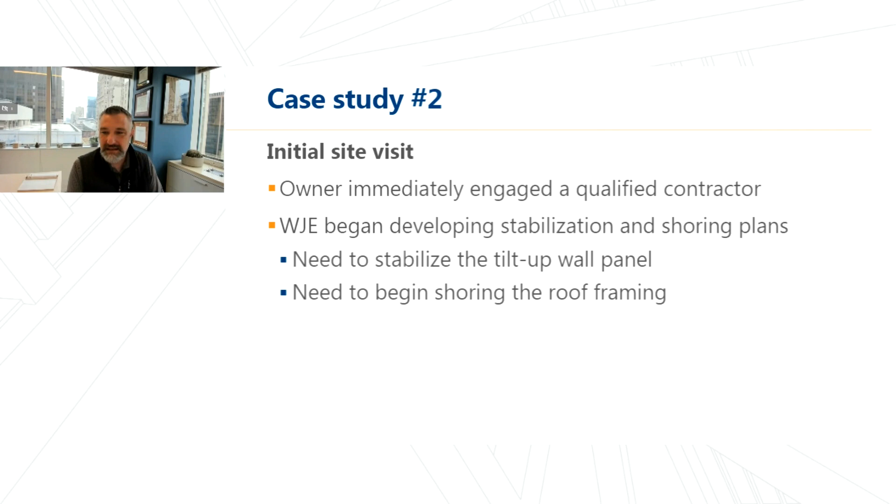We had to come in to the building from the north where the joists were still securely attached to the stable wall panels, cut out the partition walls, and began shoring the adjacent framing that was stable. This provided a protected area from which the contractors could work, moving south into the area that was affected.

So our question was, how about the new slope in the roof caused by the collapsing roof? The location where the roof joists were falling was once the high point, and now it represents a significant low point and can pond water. And of course, it had to happen the weekend prior to one of the heaviest rains we'd seen all season.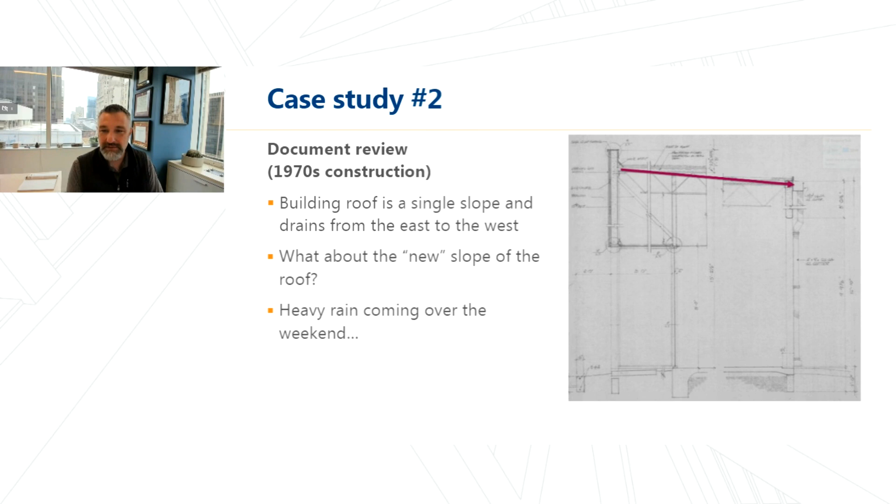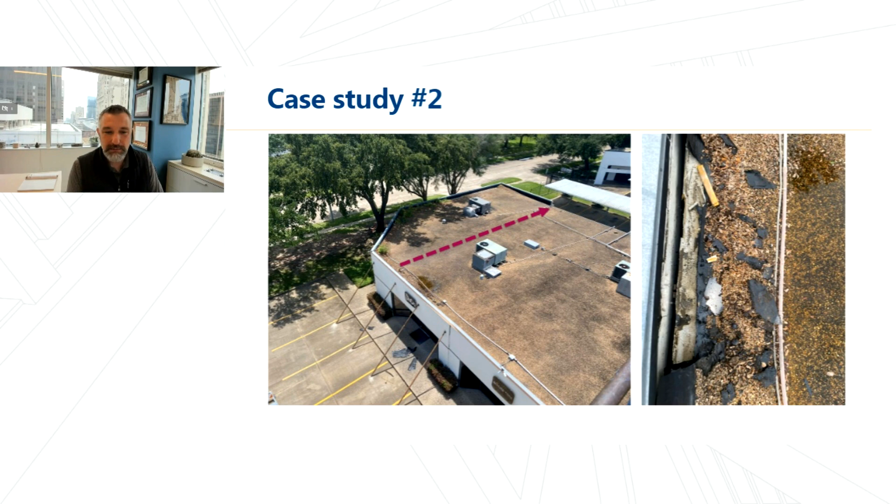So this is the aerial view of the roof, and you can see the panel stabilized. And here's the intended direction of the roof framing. Fortunately, we were able to cut out the roof framing so that the roof could drain appropriately.

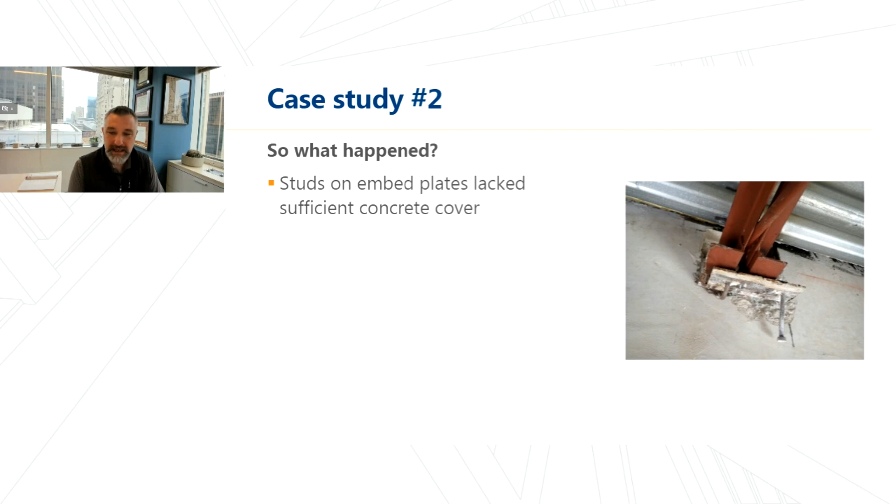So what happened to cause all this - you can see in this photo of the embed plates, we have studs on the bottom of the plate that are intended to be buried into the wall. And we have outlined here a clue that the plates weren't installed as shown on the plans.

So here's our profile again, and here is the embed plate. As you can see now, the embed plate was constructed to be outboard of the intended location, and this resulted in a significant reduction in breakout strength. In addition to that, the joists were not positioned properly, so they did not have enough concrete to bear on. They were positioned actually outboard of the wall.

And so the failure mechanism here involved a breakout of the concrete surrounding the embed plate, which caused the joist to deflect and push the wall out.

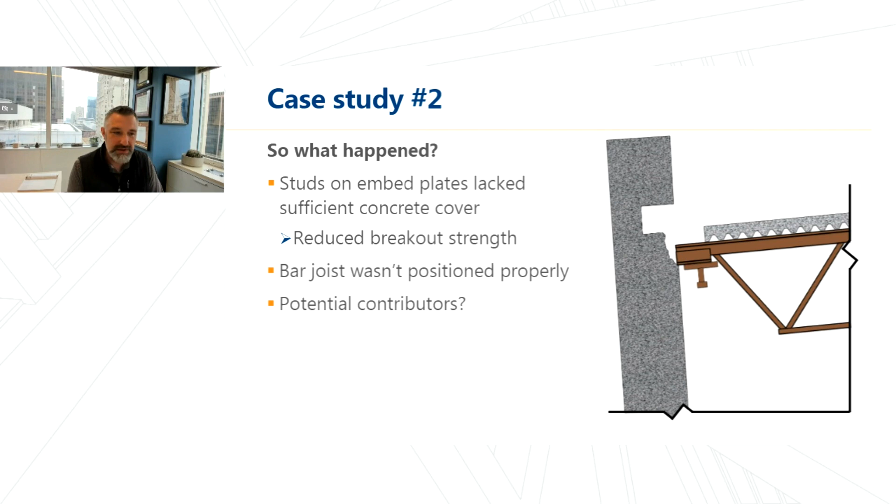We had said earlier that often failures are the result of more than one mechanism. And certainly we had construction issues, but what were some other potential contributors? Perhaps the Great Texas Freeze of 2021, where this was located, where we had loss of electricity and sustained cold temperatures for some time. We also had cyclic thermal and rain loading.

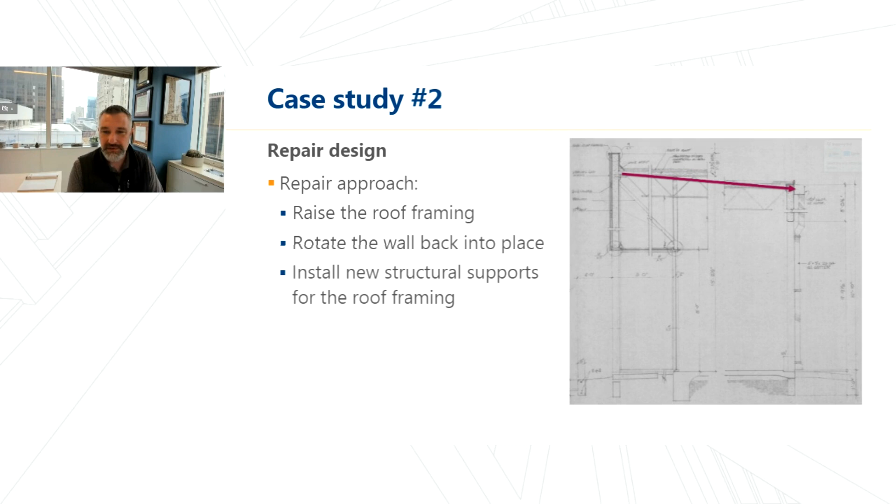The repair design was rather straightforward, and in this case, we lifted the roof framing with hydraulic jacks, which I'll just show you a few pictures of. We rotated the wall back into place and installed new structural steel. So here's a couple of images of that roof being raised and the wall panel being rotated back into place.

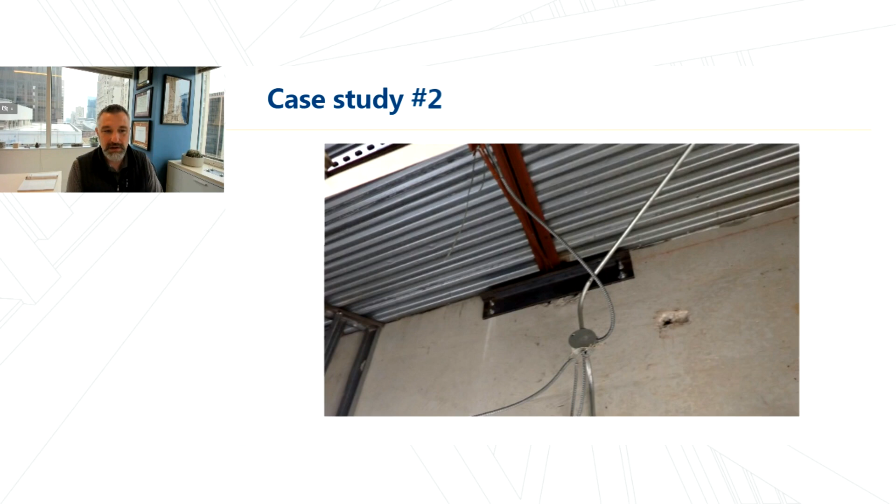And here's the typical repair that we use to install and support the faulty embed assembly. The repairs we designed were able to correct the construction issues, and as part of the investigative process and detailed site investigation, we found that this condition actually exists in other locations. So we were able to implement those repairs in other locations of the building that had not yet collapsed.

What are our lessons learned? First, we'd like to point out that not all cracks and sounds you see or hear in your buildings are significant. But the red flags that the owner was paying attention to were the sudden changes in conditions, and the investigative process helped us piece together these clues. Another lesson is that it took time for this condition to manifest, and we wouldn't have necessarily caught this if we had just performed a routine structural inspection that didn't include a view of the interior.

A big takeaway is that the owner was very responsive, and this helped them save the building. We had an established relationship with that owner, as well as the contractor who arrived on site, so those relationships were very helpful to have in place.

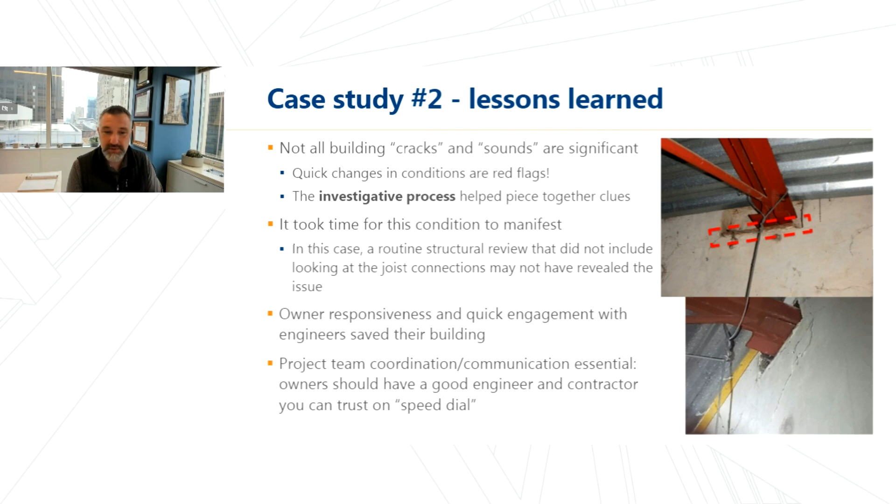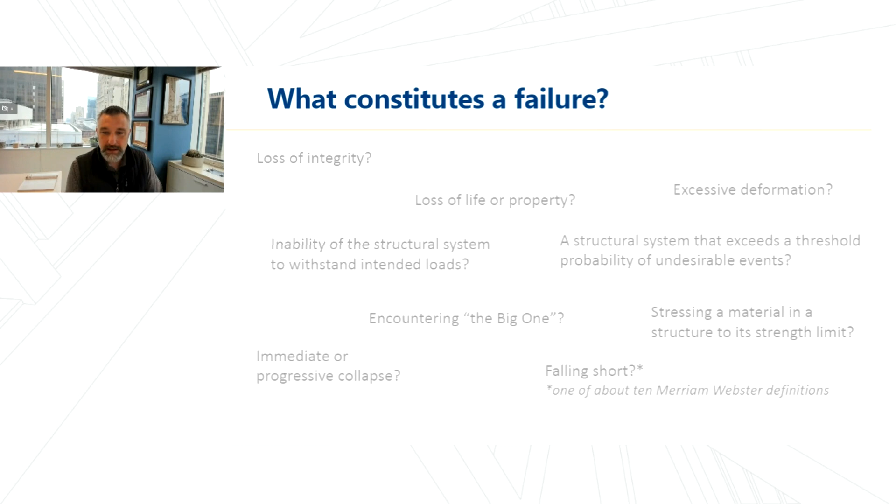Todd and I are going to wrap up with some closing thoughts, and I'd like to bring us back to the question we posed at the beginning, which is what constitutes a failure? The ones we presented on were certainly failures, and they were exceptionally rare. I'd like to point that out. These are not common, and the parties involved were appropriately responsive, which helped us solve this problem.

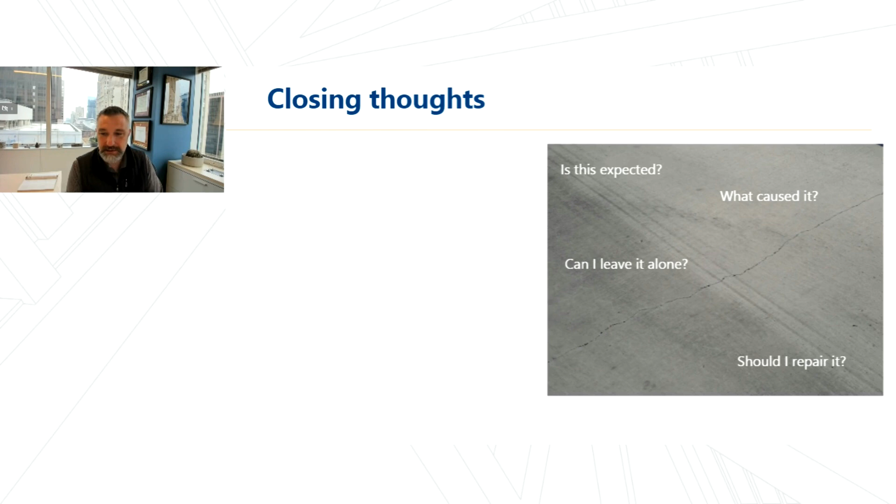But you may still be asking yourself, how do I know if that crack that I'm looking at is typical or unique? There's not a simple answer, and some of the components of the investigative process will be required to provide answers and solutions. Often, the first two components that Todd talked about, the initial site visit and the document review, sometimes that's sufficient to understand the complexity of the problem. And we typically don't know if the other components will be required until we at least perform these two.

We like to think about it as like you're going to the doctor, right? Your initial site visit is your initial appointment, and the document review and the background history, that's you sitting in a waiting room going through 35 pages of seemingly unimportant information that you're filling out. But those are actually quite essential to the doctor. So the investigative process is important, but there's still some additional things that you can be aware of as a building owner.

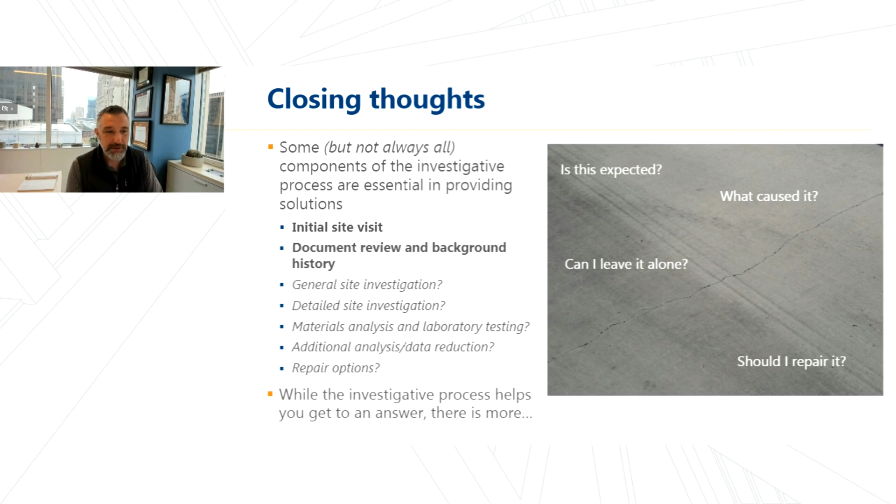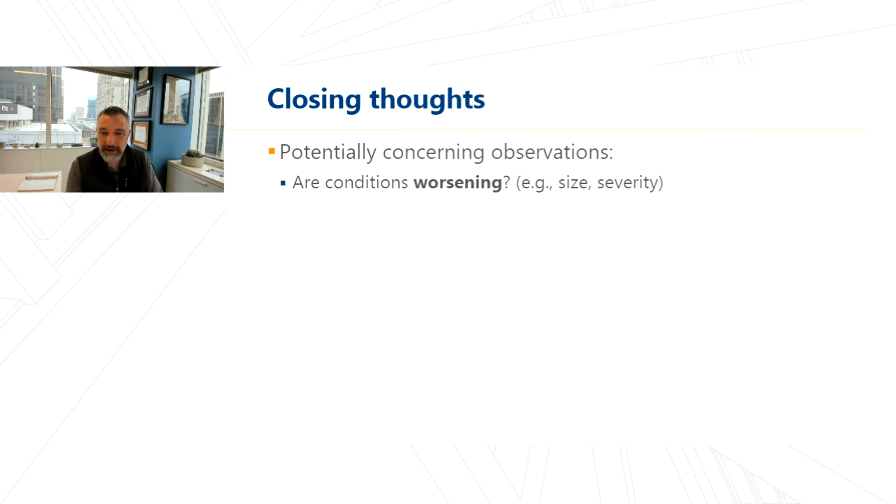So, potentially concerning observations: you're right to be concerned when you have conditions that are worsening, meaning they increase in size and severity. Are all building components moving more than normal? These are things to be concerned about. Are there unusual noises that aren't just the HVAC acting up? When in doubt, seek a professional.

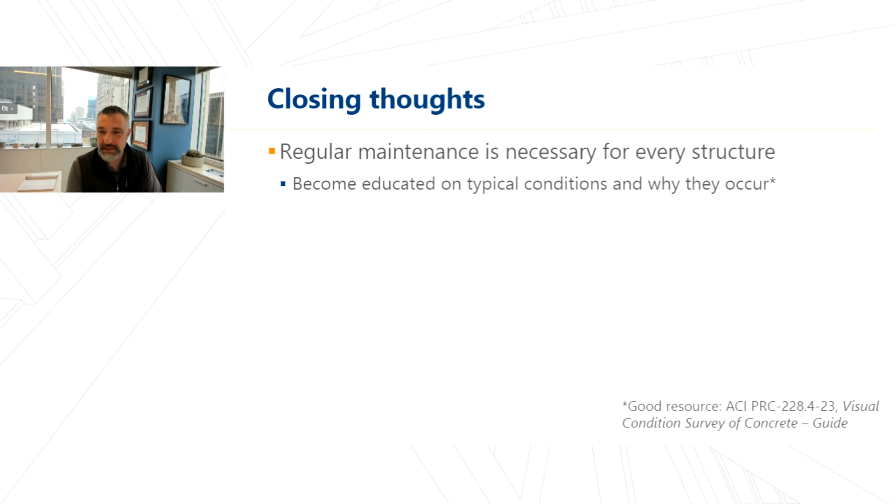Finally, we'll leave you with some recommendations on how to think about regular maintenance, which is necessary for every structure. It's important to become educated on what conditions are typical and why they occur. A good reference is down here at the bottom right, the Visual Condition Survey of Concrete. It's a good guide. It's also important that you address deterioration in an appropriate time frame.

Before you repair it, though, you want to know why it occurred, and otherwise you may be making the repair again sooner than you anticipated. You also want to engage an engineer potentially to help you look at options for the repairs. A big one is avoiding moisture inside buildings. Moisture is intended to be outside of the building, and we should keep it that way by maintaining, repairing, and replacing joints and sealants. Finally, we want to keep those in maintenance and inspection records. They can be a critical part of the investigation.

With that, I'd like to turn it back over to Liz to take questions.

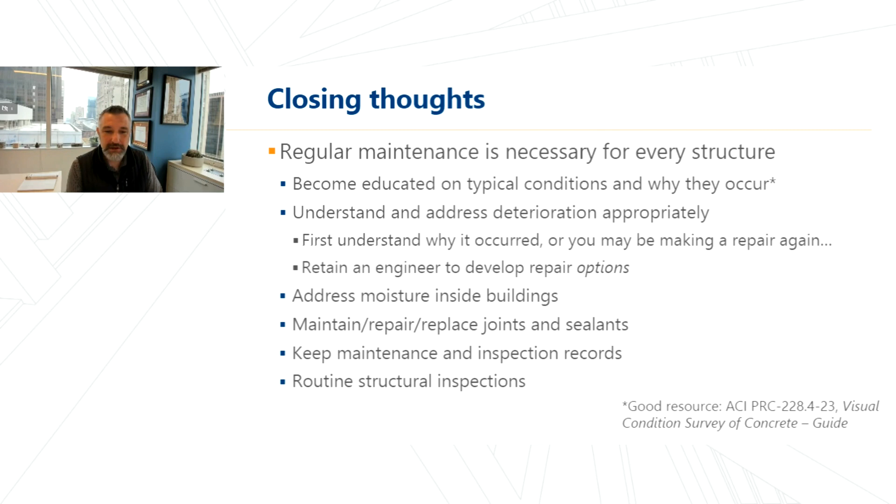Is cracking of the double T stem and fillet always considered unusual, or was the large width of the cracks in question what tipped you off to the fact that cracks were more than a typical deterioration condition? Yeah, that's a very good question. We see cracks in the fillets of double T's quite frequently due to lifting, and those cracks are typically much tighter than what we saw in this particular case. So that kind of clued us that there's something else going on, given we had cracks up to 1/8 of an inch. We would not see crack widths that wide for other reasons.

Okay, a couple more questions for you, Todd.

At what point did the team assess whether there was an immediate threat to flange compressive strength stemming from DEF? That's a great question. We assessed that very early on. The no occupancy rule was put in place and kept until we had a chance to get eyes on the structure and hands on the structure, then do an analysis to understand if they could occupy the gym or not. That was done very shortly after our site investigation. So we did turn it over so they could use the gym for normal activities, but not for tornado events.